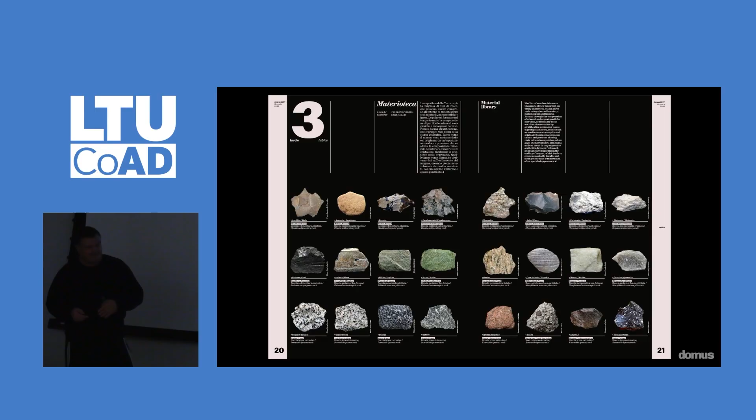By looking at stone, we looked at the history of stone as a building material. We looked at where different types of stone actually exist geologically, and the different structural buildups between granite, marble, and limestone—they all have different attributes. We looked at ways of working and finishing the stone.

Take a look at this—this is structural stone making the arch, or look at that wonderful stairwell that just seems to be hovering in space.

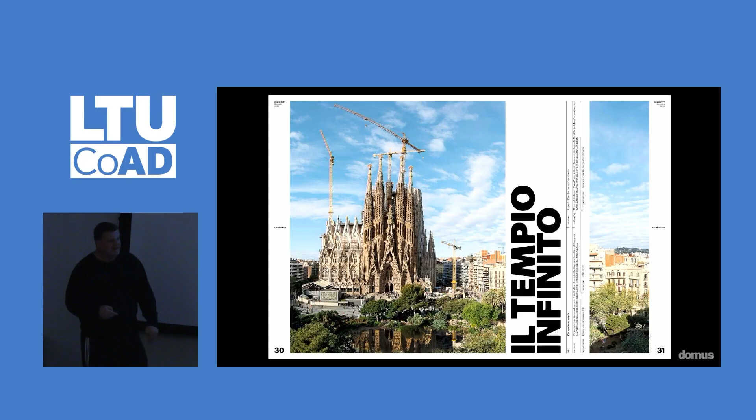And looking at ways of reusing stone because it's such a solid material—a stone cathedral that's been under construction for 140 years and will finally be finishing this year: Gaudi's cathedral in Barcelona, a 140-year construction site.

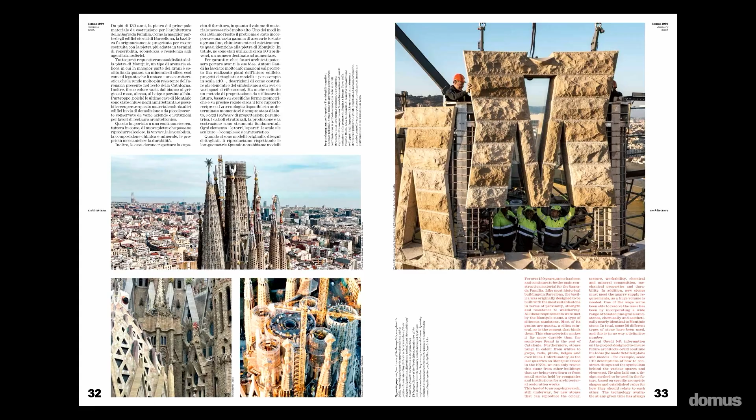When Gaudi designed this, they hadn't even made the machinery to actually produce the stone the way he had drawn it. It's as if the technology had to catch up with the designs—if you're talking about designing for the future, it's only now that we can actually finish those designs that he made.

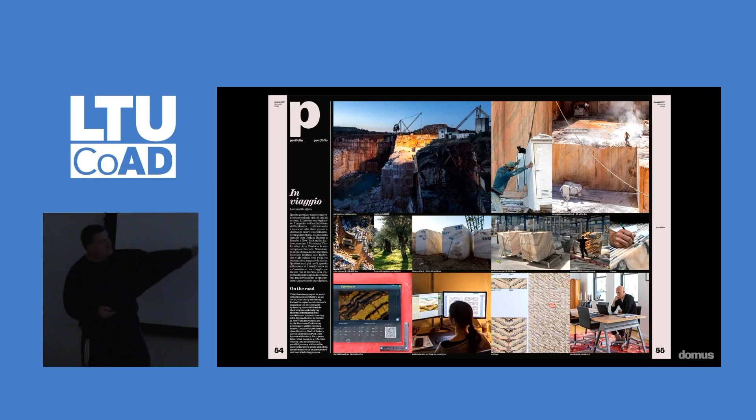How new designers are using stone in a very fresh way—following it from its origin quarry through to the use of this beautiful marble, Carrara, in the Perelman Performing Arts Center. Oftentimes architects are limited in how they think about materials because you have to follow rules and regulations, so artists are free to really delve and discover.

So we capture a lot of artists using stone—these are big chairs that swivel, almost like they're light; your finger can just push them and they swivel around. These look like cushions or pillows, but are actually travertine—thinking of stone in very different ways than we typically would.

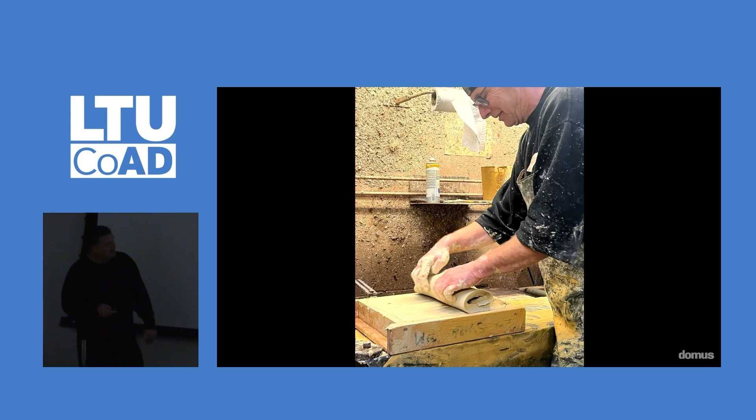We also asked the artisans, the people who work with these materials, to help us make all the covers. Here's a smoking fellow making the Domus stone cover. Here's a clay artist making the earth cover with baked terracotta, and you can see how many different treatments you get—a concrete worker making the concrete cover, and metal.

Now I want to switch gears, because that one year of curating the magazine gave us a real in-depth view of these 10 different materials. Now I want to take you through and show you how in our own work we actually work within materials, and how they become the drivers of the design.

We're going to start in the Arctic Circle in the northern parts of Sweden. There's a lovely family who for a decade have been inviting different architects to build tree houses in their backyard—what a cool project to get. They've been building one single bedroom up in the treetops at a time. We were the 8th architect they called, and this is their backyard—you can now Airbnb rent these tree houses for a night or a week and hang out.

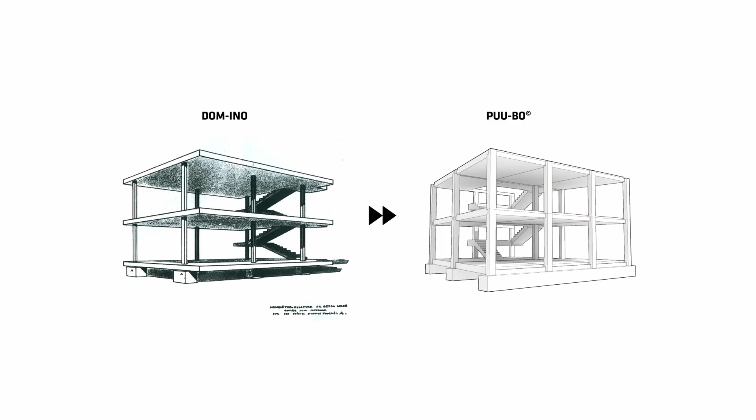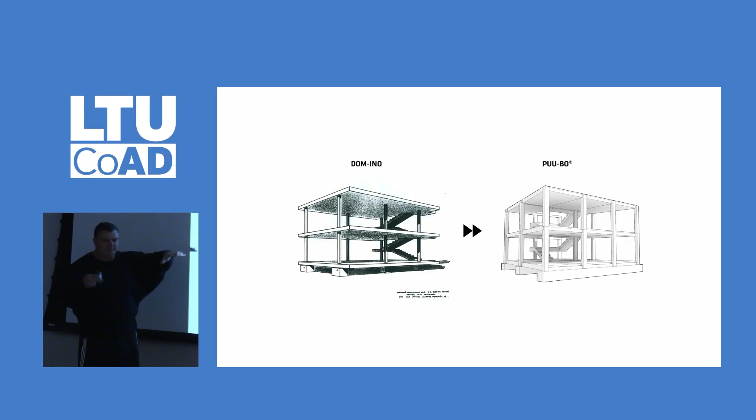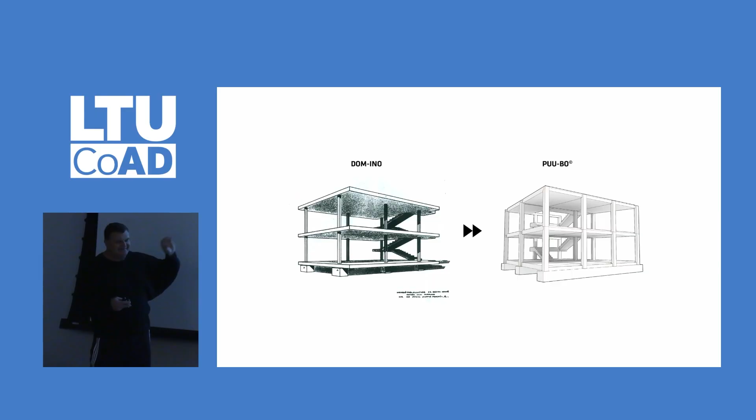Also in the vein of wood, this is something you should be familiar with - Corbu's Dom-Ino house. This was a concept at the start of modernism where new materials were suddenly being used: reinforced concrete, large panes of float glass or flat glass, which weren't really available before then. So this idea of a free plan, as opposed to a building with a bunch of rooms - it's more of a warehouse kind of idea, and you just put up partitions in that space. You're really just making a column grid and a fire stair that takes you from top to bottom. It's taking architecture down to the essential elements.

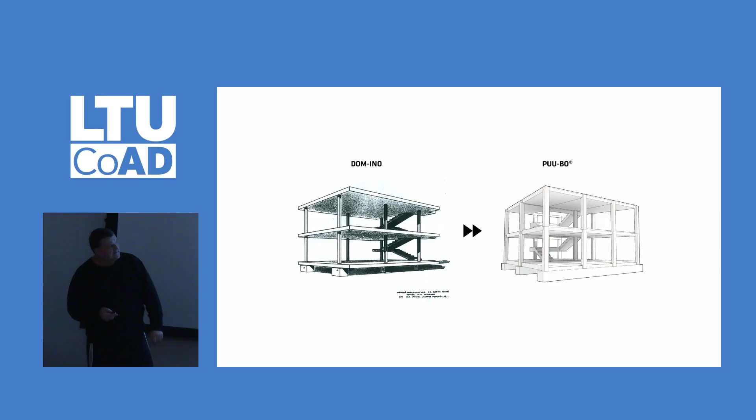But we hadn't really thought of a sustainable approach to modernism or the Dom-Ino house. So we came up with a grid system, a prefab system out of wood that we call Puu-Bo, because it's manufactured in Finland. Instead of a rigid square or rectangle, it's a wedge, like a piece of pie, a pizza. That allows you to go from just bar buildings and double-loaded corridors to designing things that are a bit more organic and can fit into different sites.

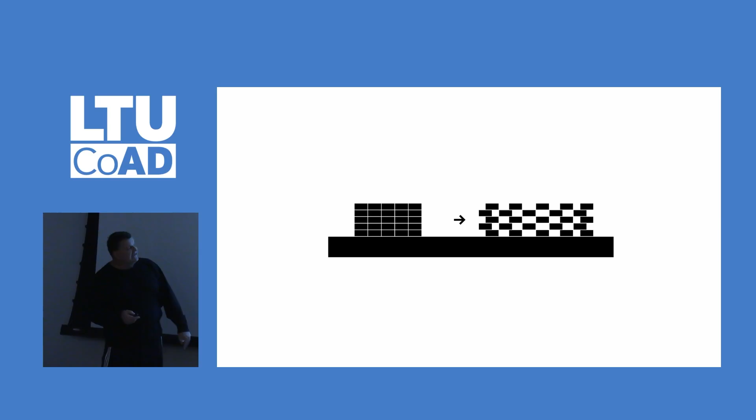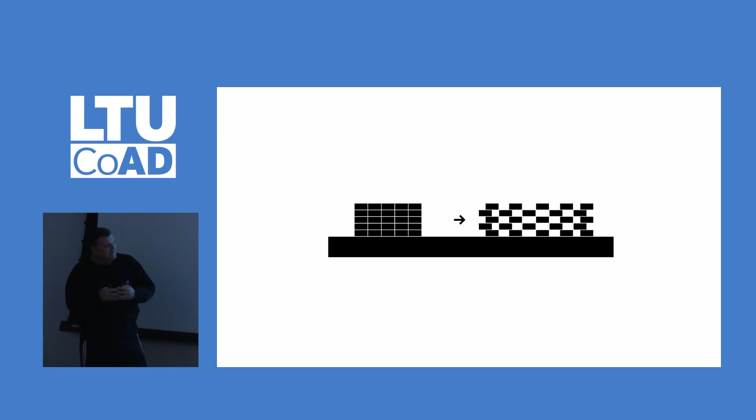The other idea we had was that rather than just building one on top of the other, which is typical in prefab construction, what if we pulled the prefab elements apart, creating a porosity? The beauty is that when you consider each prefab element, which is the darker square, by pulling it apart you actually create space - you get a roof, a floor, and two walls for free by pulling apart the prefab elements.

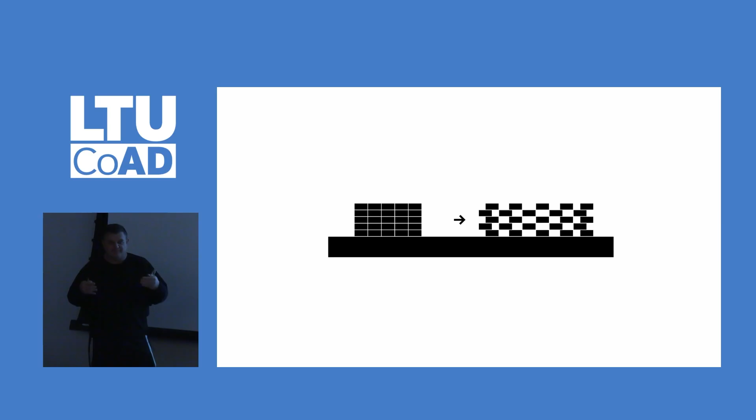This is a standard prefab kind of project, very efficient, very rectilinear. That's the same project built for the same price, but it gives you a lot more space - same number of units. What's nice is it gives you the chance to actually design the site, not just put a building straight down along the street.

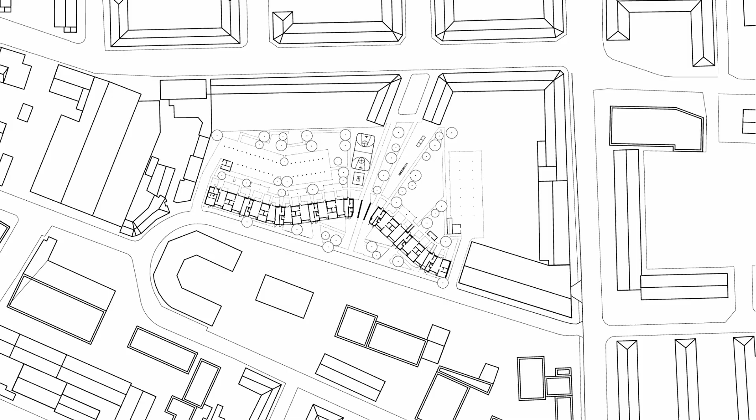Looking at water is more enjoyable than looking at dirt. And thus, any building that is next to water has a higher value.

Imagine that we take rainwater that's for free and we push it down underground, and it just causes problems all over the place. We could instead build retention ponds, have the water come into the ponds, enjoy the water while it's there, and it naturally evaporates. Then you don't have to invest in all of the underground canalization.

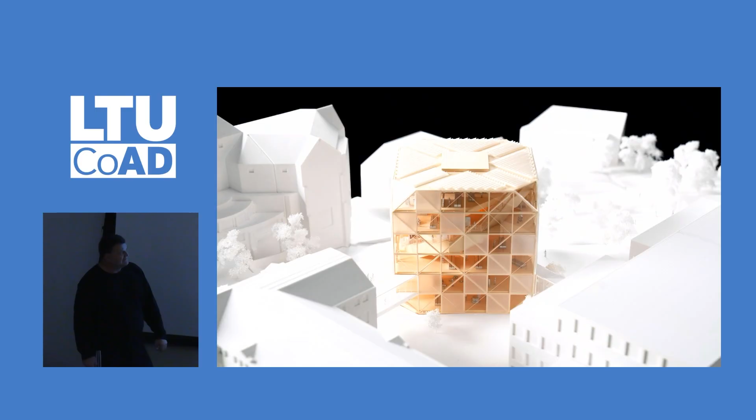So what we're doing is we are historically preserving this project. We are adaptively reusing and reshaping the 1970s project, and we are adding the cube, the wood cube, in the center out of mass timber. So now this is a campus of 3 buildings from 3 different eras that will be the centerpiece of the school. It's 6 stories, and it's 100% mass timber.

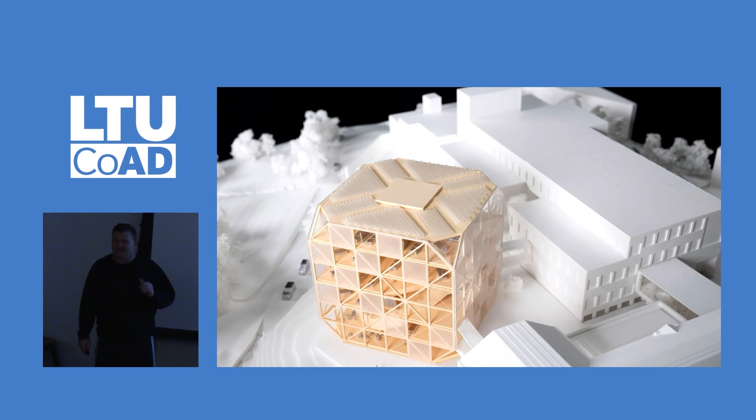You'll hear mass timber being used a lot. And when it's used, you should ask, well, does it have steel in it? Because then it's not a mass timber project, it's a hybrid project using wood and steel. Most often the steel is there for all of the forces that the wood can't endure. But what we wanted to see is, could we create a 100% mass timber project? Because it's been done at different scales, smaller scales, not at this scale.

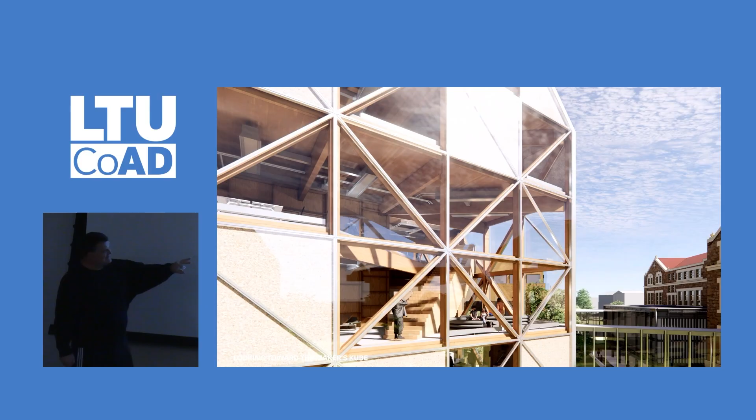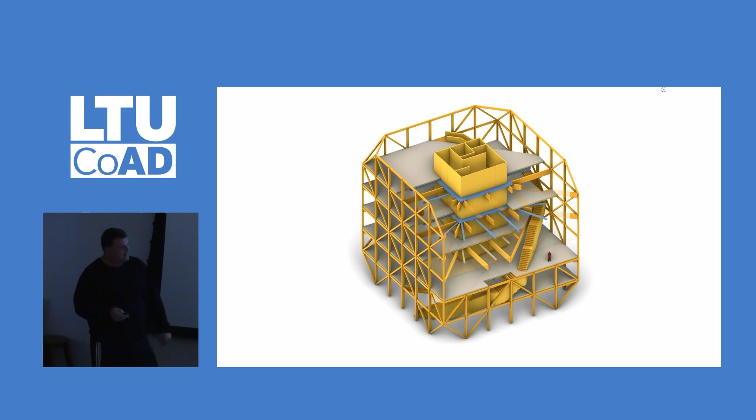Here you can see a few renderings, and the space has this wonderful stair that leads up. There's studio spaces that look down into each other. Here's the structural principle, which we have worked out with StructureCraft. They are essential in having both the architecture and the engineering actually work. A few of the structural diagrams show you which walls are performing which of the jobs.

Now, I realize that this gets quite technical, but as students of architecture, it's really important that we open ourselves up and work collaboratively with engineers, because we need to understand how the engineering, the shear walls and the cross bracing and all of those things will actually affect the spatial solution.

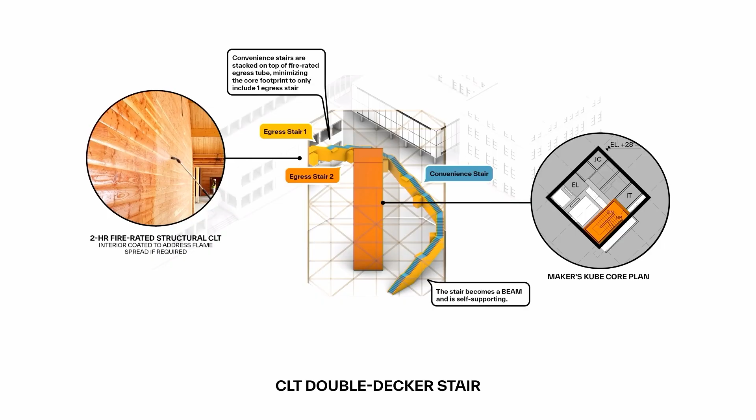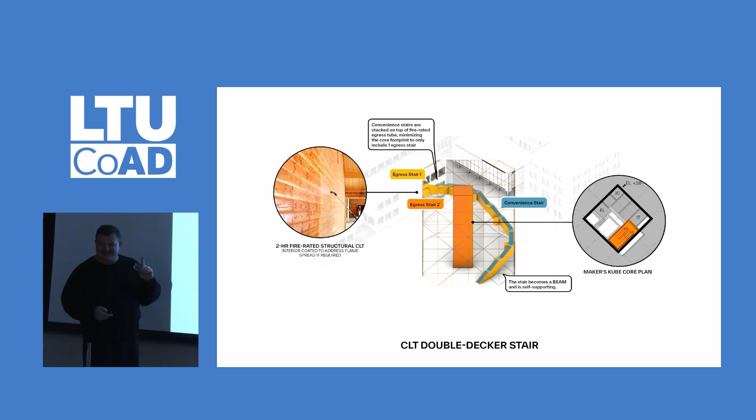So this is where you take all of the structural ideas together, and then look at the stair. The stair is this really interesting thing where you have a top stair in blue, which is basically a stair that leads you open air from the top of the floor down to the ground floor. But it also needs to have a fire stair, right? So underneath the blue stair, believe it or not, is another stair that's fully enclosed. That's your fire stair.

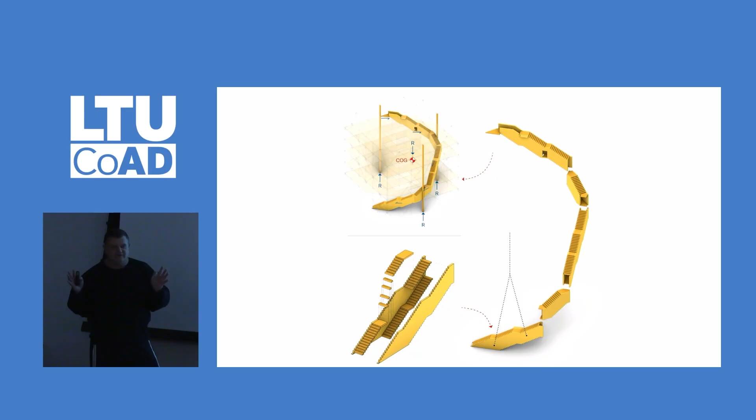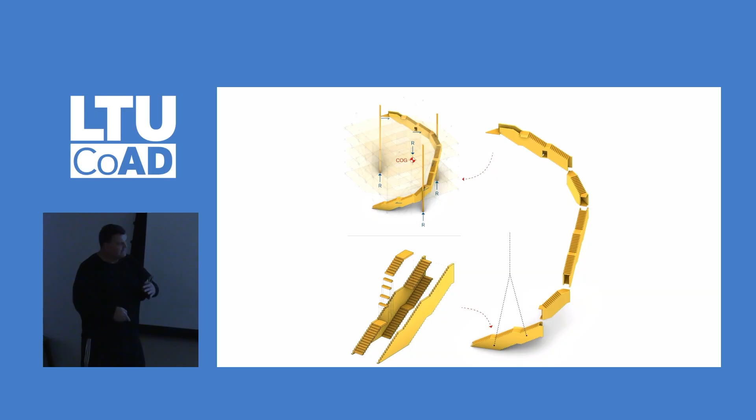And because of the thickness of the wood, the charring that happens during a fire, this is actually rated the same way as if you put 2.5 or 2 layers of gyp and you fireproofed and did all of that—this is actually performing better than what we would typically do for fire stairs. And this all had to go through regulatory approvals, and we had to show how this was working. We had to fire test the different constructions. We had to go into the weeds.

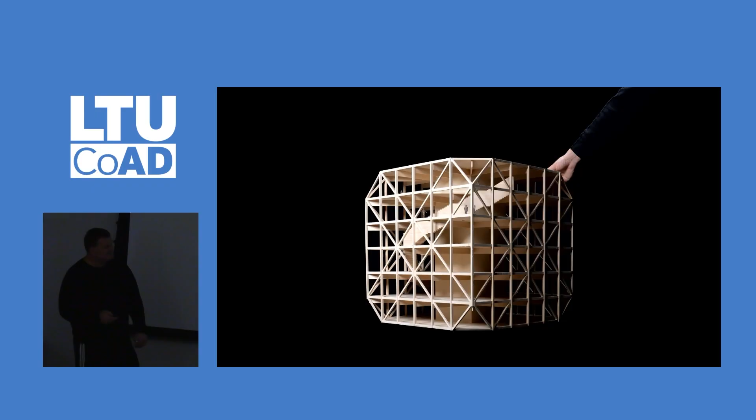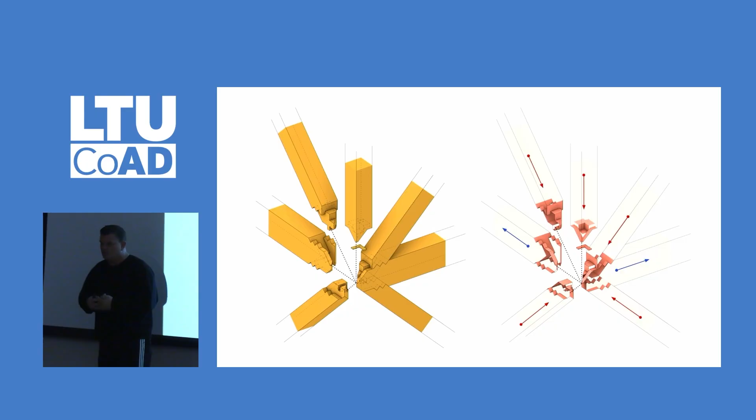I'm so excited to say that this is going to be a school of architecture in about 3 to 4 years. This is how we get the wood on wood connections with no metal. So we're using Japanese carpentry and using the kind of CNC machines and routing machines that allow you to get that kind of a detail.

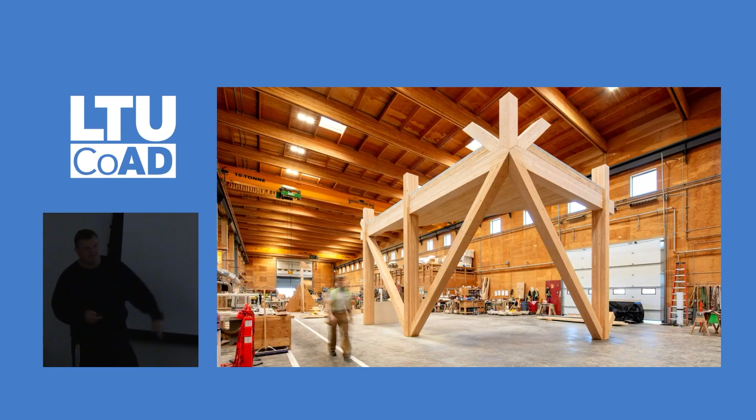So this is with StructureCraft, who are both the engineers, the fabricators, and the installers. It's very rare that you would be able to find all three of those things in the same group. This is a one-to-one mock-up that was built for just one corner, and then this shows you the actual joint.

Now, I saw a bunch of incredible car designs out there in the school, so I put this one in here because we all know Toyota as one of the largest car manufacturers in the world, but they had an issue. They came to us and said, architects, when they show the future of the world, there are no cars, there's only bicycles. What's up? What happened to all the cars? Why can't you guys put cars in your renderings? And help us understand what the future of driving could be.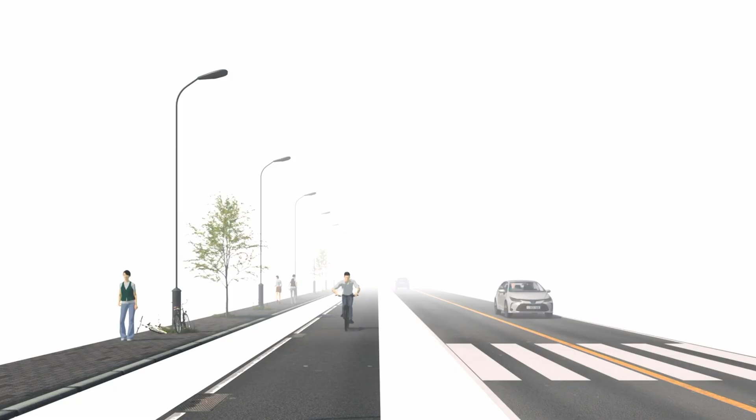So this is Toyoda-san and Bjarke at the Consumer Electronics Show in 2020, I believe. So this is the idea: in a typical street, you have sidewalk, bicycle path, and street all connected and in the same place. So what we're saying is, what if we actually take each of those three different mobilities?

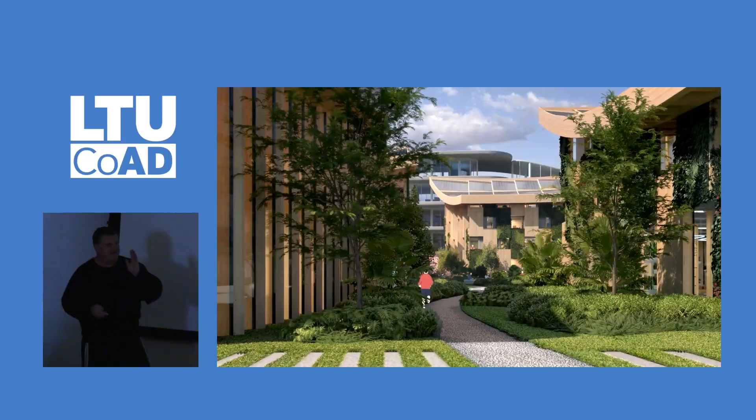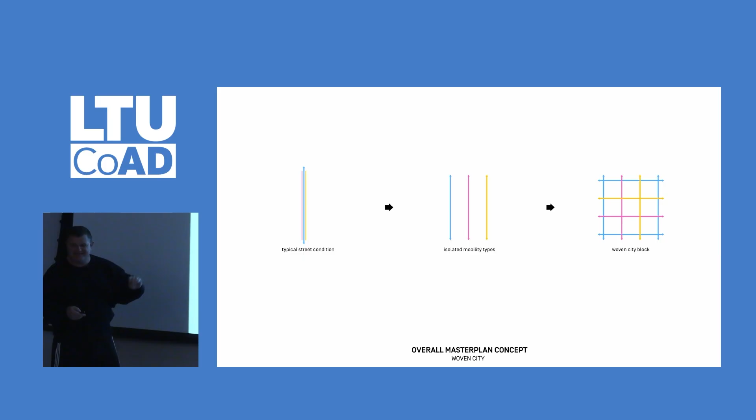Autonomous vehicles have one street. Electric bicycles and scooters would have a secondary street. And pedestrians walking and strolling would have a third street. Instead of having a grid within cities where all three are always combined, we actually separate them, so New York would have certain streets that are just vehicular, others that are just scooters and bicycles, and a third that is just walking. What if you thought of that grid having those three different movements still able to access and deliver to each site, but you create safer corridors for different speeds of movement? And what if you start doing that at a city scale?

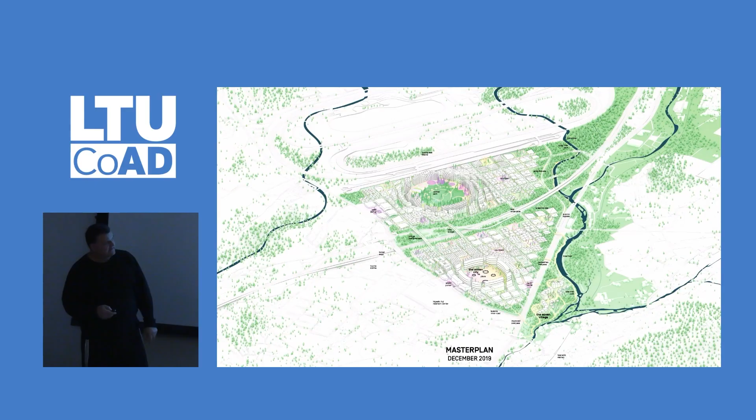So you create plazas, little parks, pocket parks, and so forth. Toyota basically allowed us to take a 1960s car manufacturing site just at the foot of Mount Fuji, and to start planning a new way of building a city using their technologies of autonomous vehicles, robotic movement of drones and delivery systems, and e-bikes.

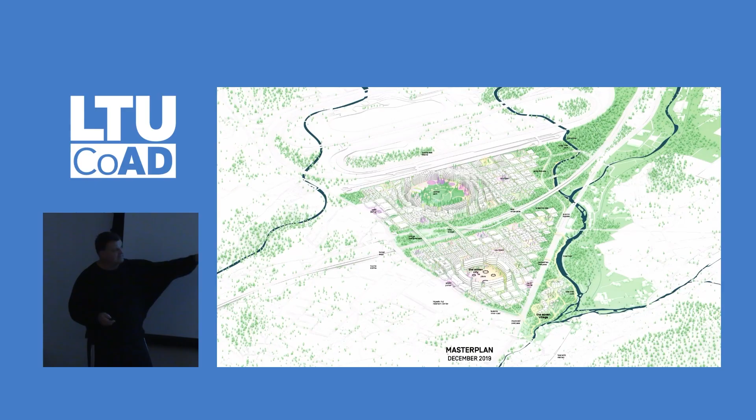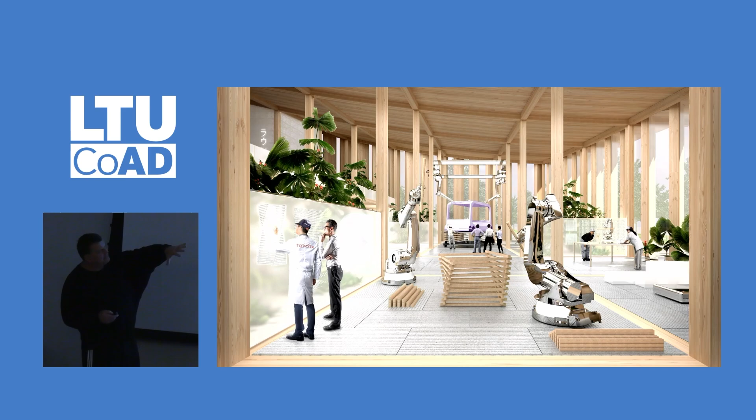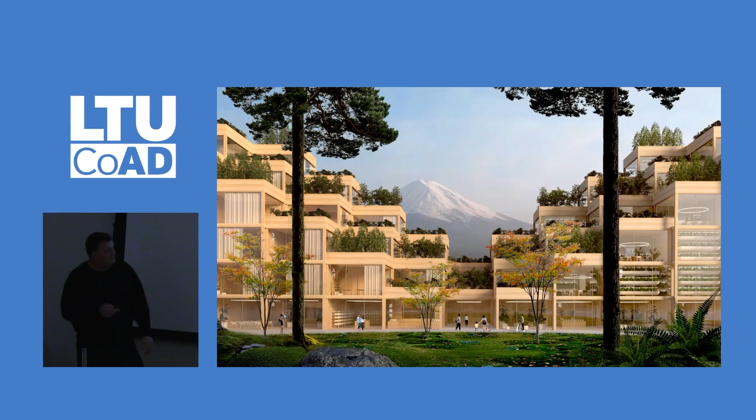And we created a vision, again using Japanese wood architecture principles, to create laboratories to test out new technologies, to create multidisciplinary locations for people to exchange, and to create living opportunities for multi-generational housing that would all be testing.

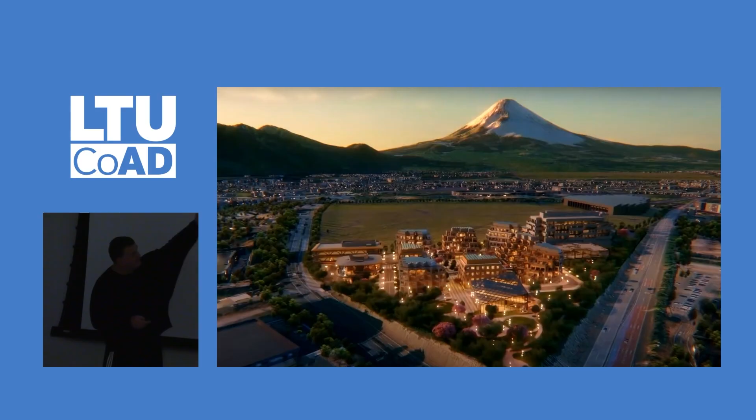Phases 2 and 3 are what you see in the background there, a construction site from when that was under construction. So it's literally a laboratory for the future of mobility, some of which I saw also in the hallways here, those autonomous electric cars.

We're going to go to glass. In glass, we worked with Google on their headquarters in Mountain View. The interesting thing here is that Larry Page, one of the co-founders of Google, was trying to hire an architect to build the headquarters. He literally said, you know, when engineers have a problem, they stick 10 engineers into a room, and they collectively solve the issue. When you architects start to design things, you like to do it individually, and then it's your idea. So there's a little bit of ego in the making of a project. He wanted to test out his theory that if he actually hired multiple architects and we had to work collectively together, he might get a better building out of it.

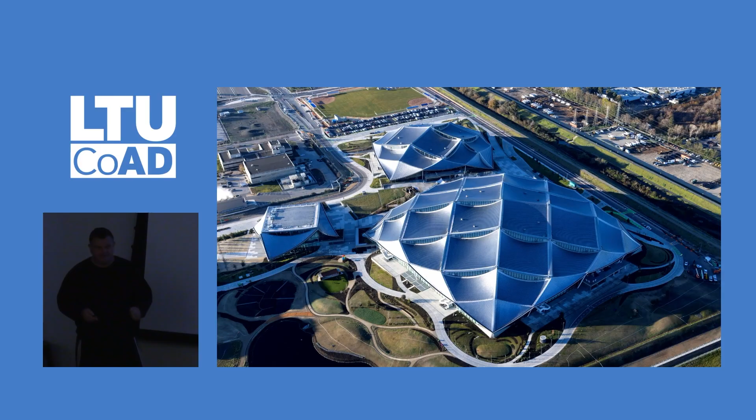So 3 architects, Big, Heatherwick, and Adamson, actually all had to work together to design about 5 million square feet for Google in Mountain View. And this is now all built and taken into use.

What you can see there, what we developed were 30 new building systems, one of which was the roof tile, a photovoltaic tile that actually generates 40% of their operational energy just from the sun. Maybe the difference from your grandparents' solar tile is that instead of this rectilinear contraption that looks a little ugly up on a roof, with a huge tank underneath to kind of take all of the solar power and harvest it.

These are wafer thin. They can actually bend if you just attach them at 2 points, and thus we can create swoopy kind of curves on the roof. And they are better performing than the solar photovoltaics from the past. In the back it's a very small back of house that connects straight into the electrical system. So these are what you basically work underneath - what we call the handkerchiefs.

And there are 3,000 Googlers working right there, basically probably all on Gemini, because this is where the AI team is working. And what Larry Page wanted was - if any of you ever heard of Burning Man - he wanted to basically have the playa where all of the different camps of Googlers were, and then he viewed the sky as sort of clouds passing across, and he wanted to be able to see everything from one vantage point.

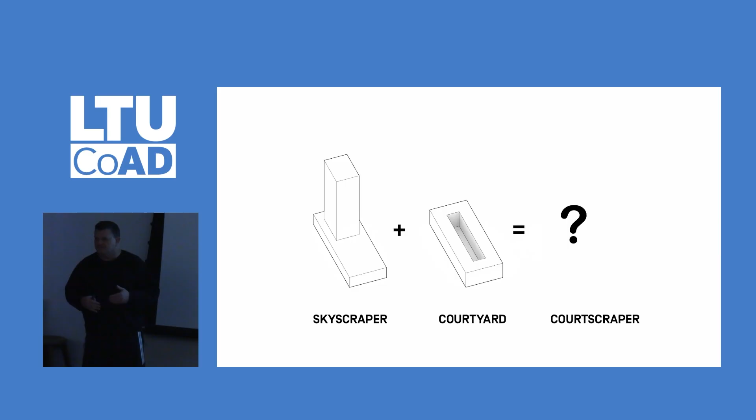We're going to go straight to metal, and here we're going to go into New York. What brought us to the US was this project in New York called the VIA 57 West. It's 705 apartments on the west side of Manhattan. Typically you have a skyscraper in New York, and in Europe you have courtyards. What if a skyscraper married a courtyard? Well, you get a courtscraper. And that's basically what we created.

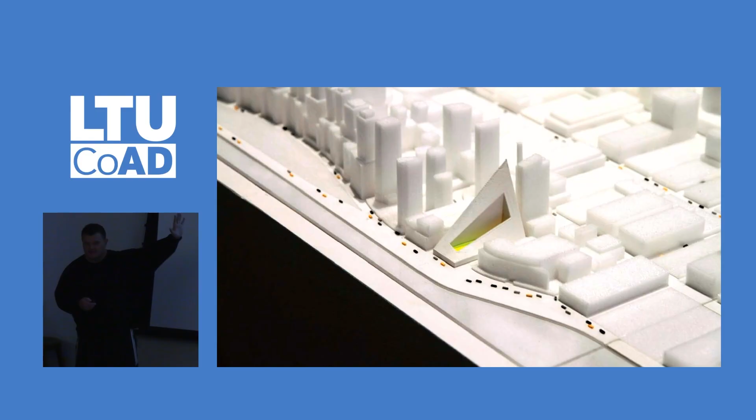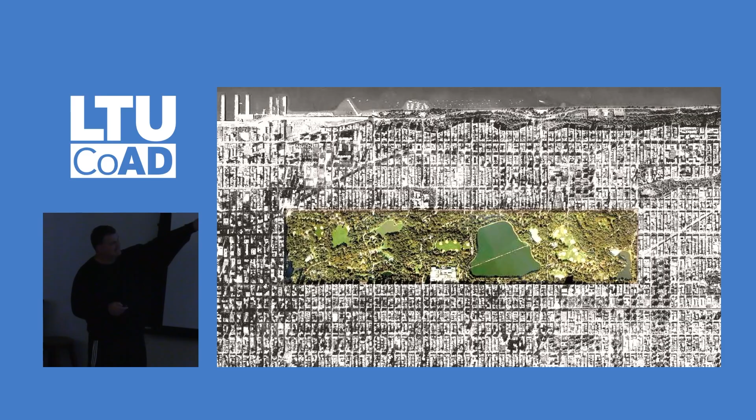It's low, 4 stories on the water side, and moves up to 44 stories on the city side. All of the folks have this wonderful garden on the 2nd floor that they can use, which during COVID became the building everyone was trying to get into, because it had that generous space. So just like Central Park acts as this wonderful release and relief of the city, so too does our courtyard - it's just 13,000 times smaller than Central Park for 705 apartments.

And the width here, interestingly, is the same width as a city street, 60 feet. So if you can live across the street from people and look into their windows, that's literally what you're doing here too. Within the park you have a wonderful array of different spaces. Imagine living in Hell's Kitchen, New York, in a 1-bedroom apartment, and you've got birds tweeting outside of your bedroom window - a pretty unique experience within the city.

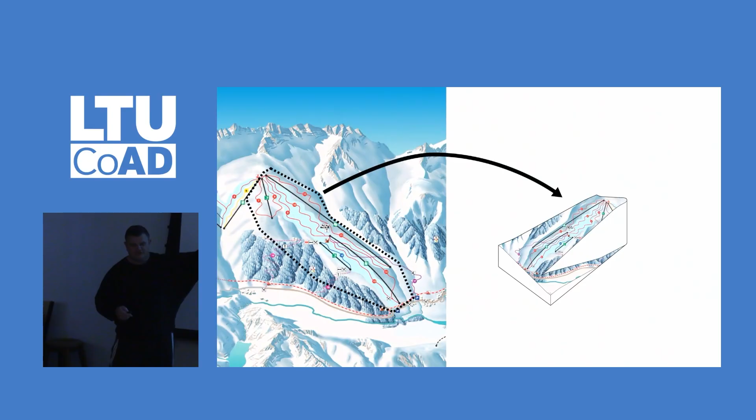This is Copenhagen. What you see there on the horizon is a waste-to-energy plant built out of mostly steel and metal. One bag of household waste is equal to 4 hours of electricity and 5 hours of heat. So this is the biggest building in the history of Denmark, the tallest in the flattest country of Europe. And since Scandinavia - Denmark has snow but no mountains - we take the mountains of trash and place an artificial ski slope on top of the trash incinerator.

So the trash incinerator functions like any other incinerator. It has a lot of furnaces that take the household waste, burn them, and in the process create energy. But on top of it is an artificial, recycled plastic, skiable surface. So you can come up to the top, put on your skis, and then enjoy a lovely ski down white trash.

We're going to go to concrete. So our own headquarters, we took as a time and an advantage to actually test out different materials. This is a concrete that actually uses 30% less carbon than traditional concrete, because we believe not everything can be built out of wood, which is a nice material from a carbon standpoint. So we will need to be smarter about concrete and steel, and do as much research as we can building from those.

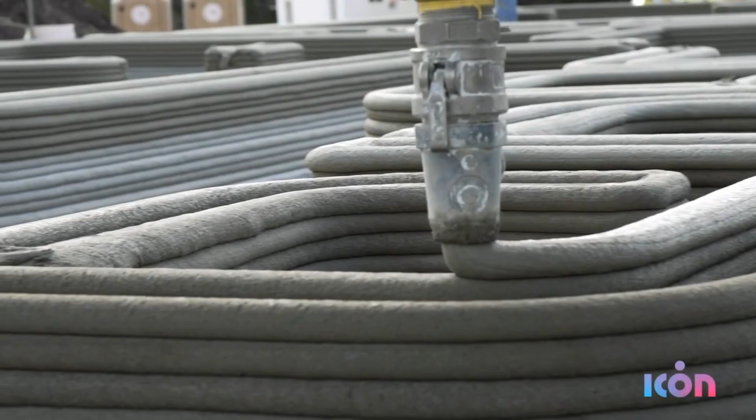We're at the tip. Also concrete, this is a 3D printer, and very much in the future, we're going to be basically seeing homes or small dwellings 3D printed with a sort of cementitious fluid material that kind of hardens as it's actually coming out. And you can see it here. It's just incredible to see, just within the 8 years that we've been working with it, how many advancements have already been made. We designed 60 different house plans for the technology.

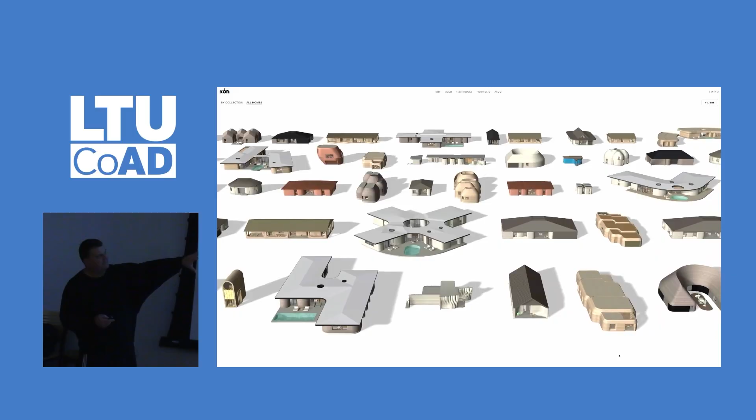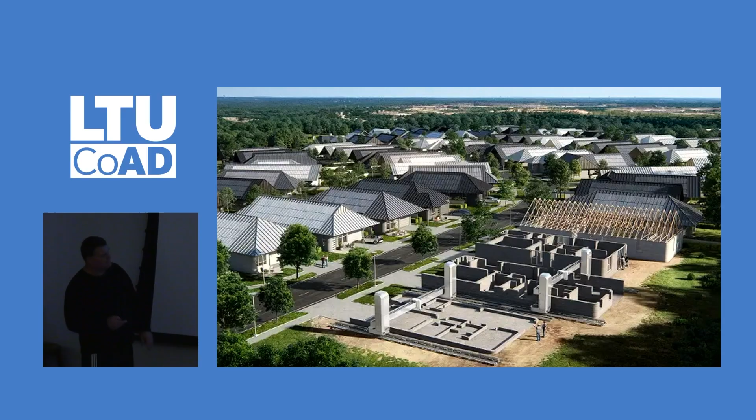You can go to the website of ICON Build and choose one of these, and then you could arrange with them to bring the printer, and literally in about 14 days, 20 days, you would have a printed home turnkey to walk into. So then there's already examples of homes here. It's 3D printed walls, but traditional wood framing for the roofs. In the next iteration of this, the roofs will also be 3D printed. And then also providing affordable housing in places where we're bringing the construction cost, the hard cost, down to about $60,000 for a 2-room home.

With the same company, Icon, we're working together with NASA and the Artemis rockets that just went to the moon and back. And we're designing spaceports and habitable spaces on the moon, printing with the moon dust, the regolith, on the moon. That's the building material. And then the printer is just basically taking it, because it has a silica. It's actually made up of obsidian. And there are examples already in Houston where they're building and testing how this is going to happen. This is a picture of some tests that were actually done with Icon. And all of this is actually funded through NASA a few years ago at $60 million. So hopefully tax dollars well spent.

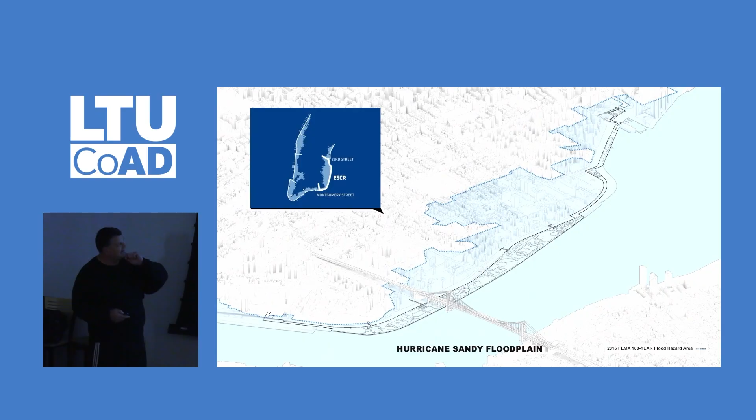Biophilia. So it was said that I work at a scale of the city and resiliency. So this was New York 2012 after Sandy. So now 14 years later, we came up with an idea to raise the edge of Manhattan to protect it against sea level rise. And this is not new. New York has been expanding and raising its edges for centuries. So this is in blue, everything that was flooded during Sandy. 200,000 people were homeless, $19 billion of damage just to the city of New York.

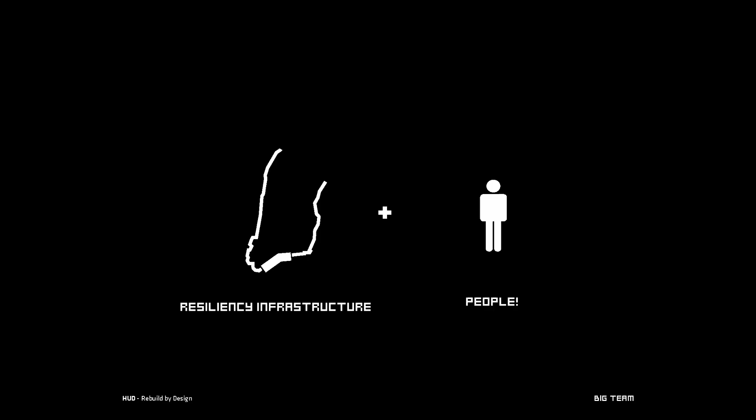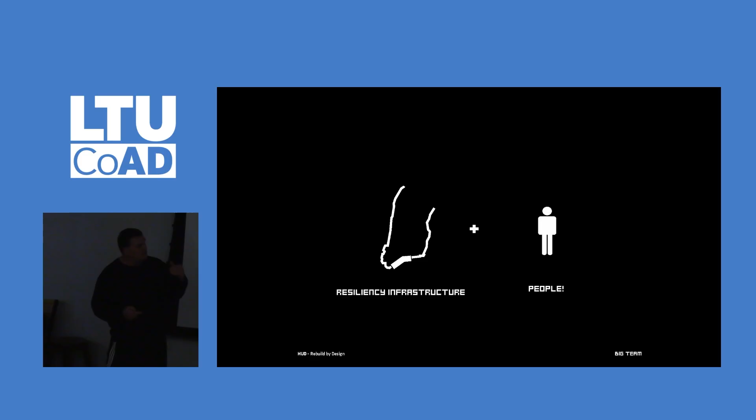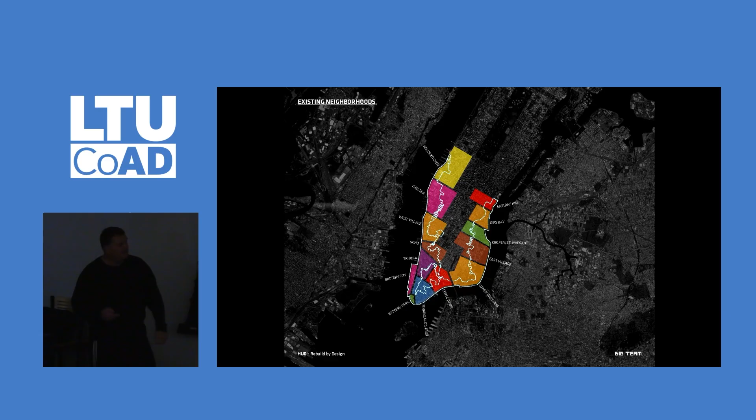And so with, again, a huge group of many different kinds of specialists, and taking over hundreds of community meetings to hear what the community wanted and needed, we came up with a kind of solution that we call social infrastructure. So typically infrastructure is done by engineers, and it's done very rationally. How do you get from point A to point B the quickest? We were kind of looking at how can you create infrastructure for people and think about the activities that the people actually enjoy. So we infused the infrastructure with side benefits, kind of win-win. And we make it and change the uses based on the different neighborhoods and the different kinds of people who are living there and their needs.

We also can't just build one continuous 10-mile long kind of solution. So we break up the solution into segments that are fundable, buildable within sort of 5-year segments, and create something that can be done in one mayoral cycle.

So that's a lot that I just said. We have 6 clients, not one. One's already hard, so imagine 6, and they don't like each other. The Department of Transportation builds roads, and they're like, why is the Department of Parks here? They like trees. So trying to get the parks and transportation departments to actually move in the same direction is pretty hard. But that, to me, is also design. This is also how one actually manages and navigates that.

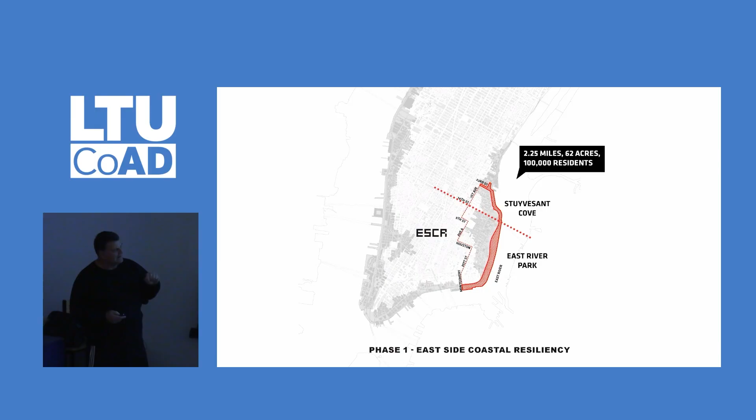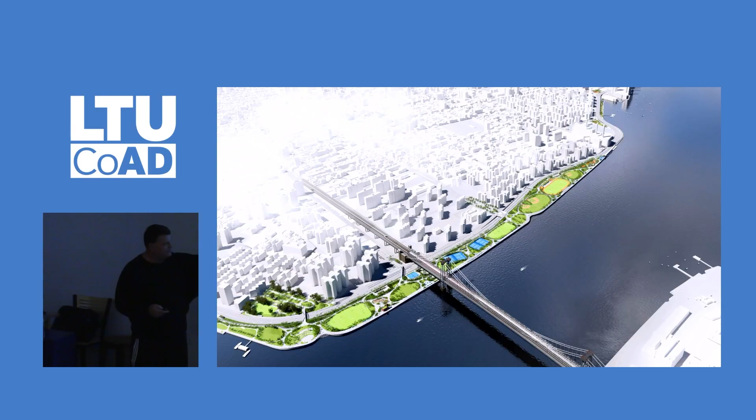So the first 2.25 miles is called ESCR, East Side Coastal Resiliency. You can see here the size is 62 acres compared to other parks in New York. And this was our vision. We call it a parkapelago, an archipelago of parks. You can see here there are little programmatic uses in each of the little islands, and it's built.

So voila, 14 years later, it's there, and people are actually enjoying it. It is raising the edge of Manhattan about 8 to 9 feet, and people can now rest assured they're not going to get flooded out of their homes. Kids are loving it, and there's different uses from soccer fields to baseball to tennis to multi-generational to a music park, so something for everybody.

Again, it's an idea that if you remember Katrina in New Orleans, they built a dumb gray wall. They basically built a wall that everyone looks at and hates. This is an idea that you use the same amount of money that was spent in New Orleans to build a wall, and you use it to build a park that everyone can enjoy every single day, and it's not something that you look at and hate. So that's the idea, that this park is viewed as something that provides more benefits.

Earth. This is our latest project, just completed a couple of weeks ago. It's called Not a Hotel, but it's a hotel. It's in Japan on these islands, and it's a small sort of 3-home kind of design that is a 90, a 180, a 270, and a 360. Very, very simple. Each of these homes is actually built to bring the old Japanese traditions into the new world.

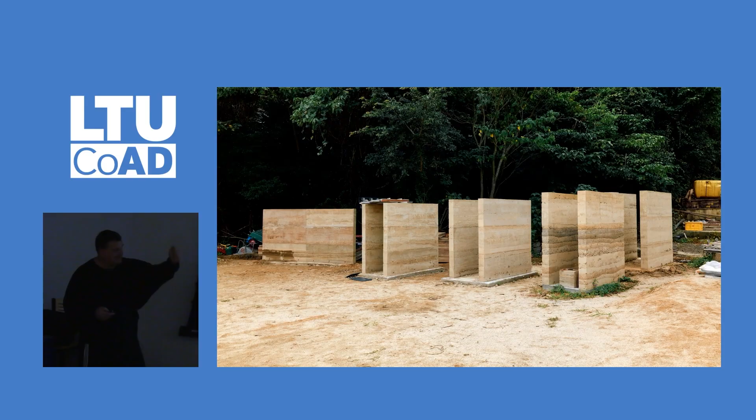So instead of shoji screens, we have glass screens that open on a curve. Instead of clay tiles, we have solar tiles on top that generate electricity. And instead of earthen walls, we have rammed earth walls that have been stamped using the earth from the site. So it's kind of a Japanese tradition, but brought into a new world. These are not renderings, these are images. Bjarke was just there and enjoyed it immensely. So next time, Airbnb, Japan, you got a destination.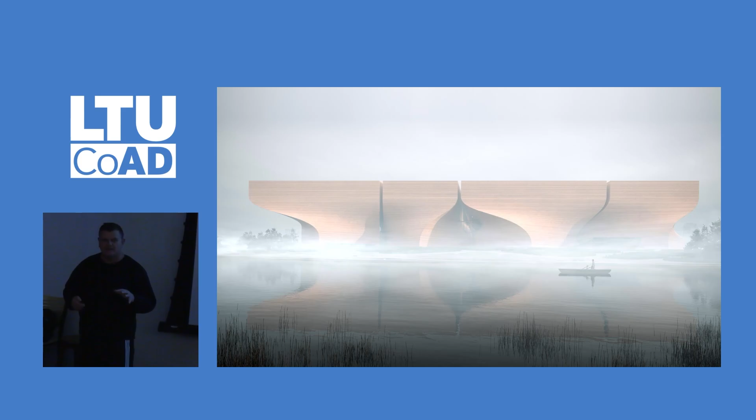This is in China, just because I told you we're going to travel around the world. This is a museum of natural history. We have one in New York, and that's where Night at the Museum, the movie, takes place. So this is the Chinese version of Robin Williams riding a horse through the museum. But here you have 8 different galleries that are all showing different epochs of history, natural history, within China.

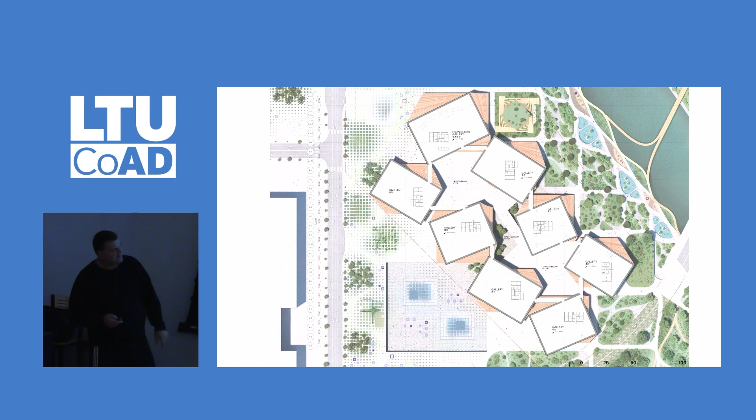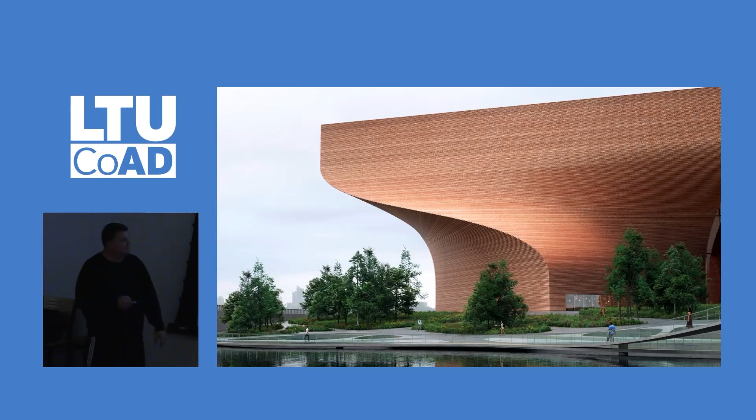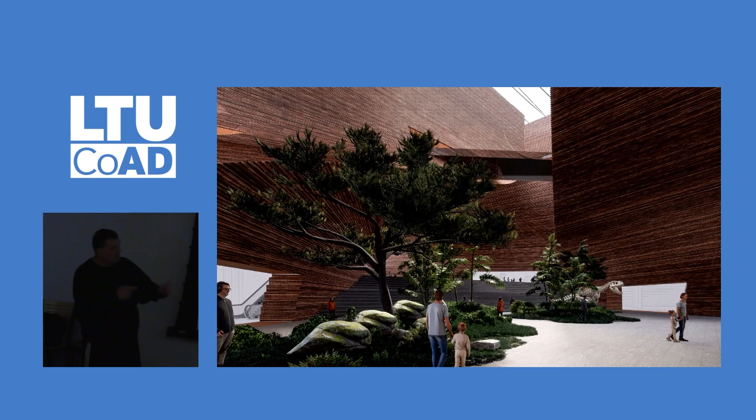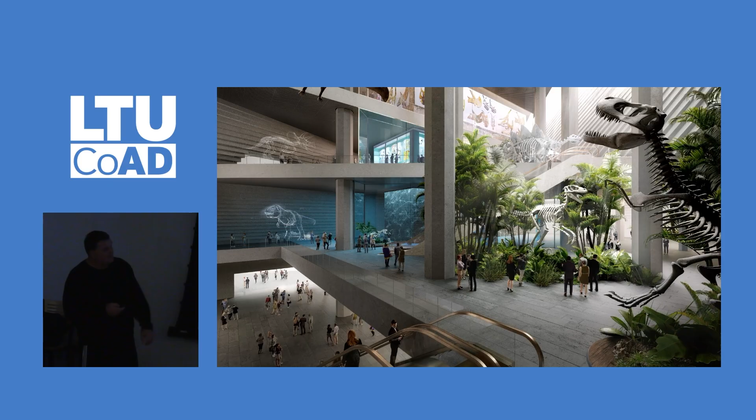It originally follows the street grid over here on the left, but then it migrates toward the river direction there on the right. And we use terracotta, a very Chinese kind of material, to build the twists of the galleries. This is something that has to be really, really worked hard in order to create that kind of seamlessness that you see there. But these are all baked in kilns and ovens, made as pieces that you can carry with 2 hands and then assemble onto the structure. This is under construction at the moment and will be done, I think, by the end of 2028.

We're getting to the end, but we're going to now combine a lot of those materialism ideas into a single project. This is Bhutan. Bhutan is a small country sandwiched between China and India, but 70-80% of it is forest. 90% of it is mountainous. So it's very hard to build.

Wonderful culture built on Buddhist principles. It's a monarchy, so there's a king, and it's been ruled by a monarchy for centuries. There are 800,000 people, and 80,000 people have left in the last 10 to 15 years. The king was just thinking, if that continues, and they're typically younger people who don't see a future for themselves, then I will not have a country in my lifetime.

Or I will have a country that I can't sustain because of the inequity of age. So he's asked us to basically design a new city from scratch for 80,000 people, the same number that have left, but to do so that we actually show what the future of Bhutan can be. And he asked us to design this city on the values of Buddhist philosophy of mindfulness, compassion, wisdom, inner peace, togetherness—very different than Western values that you would typically have. So it's called Gelephu Mindfulness City.

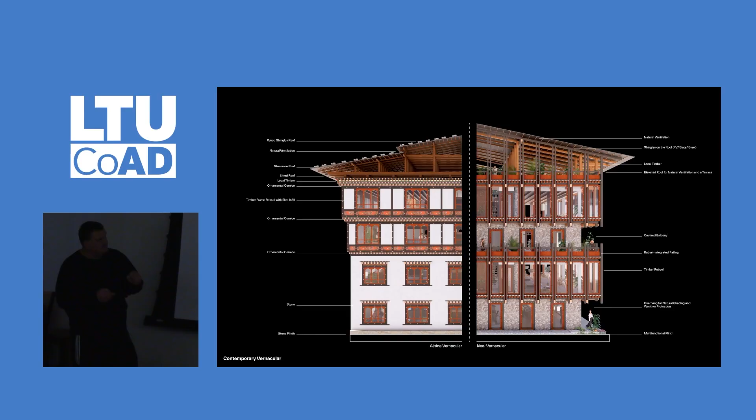And these are the materials with which we're going to work: bamboo, wood, earthen bricks, and stone, river stone. These are the typical ways that the current Bhutanese architecture is built, made up of stick-built construction, and they have a very strong identity. They build typically 4 and 5 story buildings, and we're learning from those kind of principles. They also have never really had architects—they've done most everything with master craftsmen teaching other apprentices and pupils how to build.

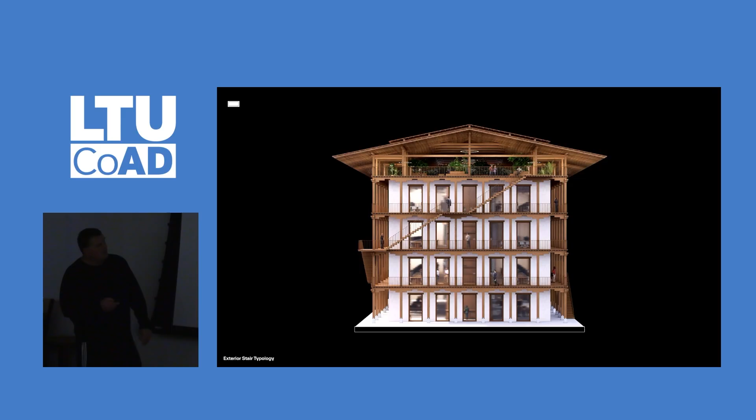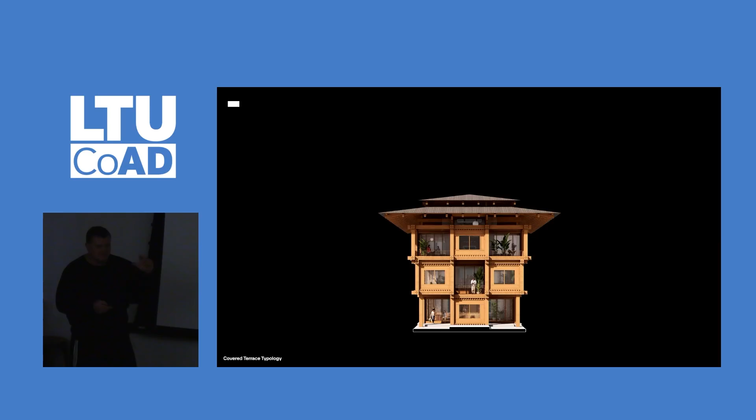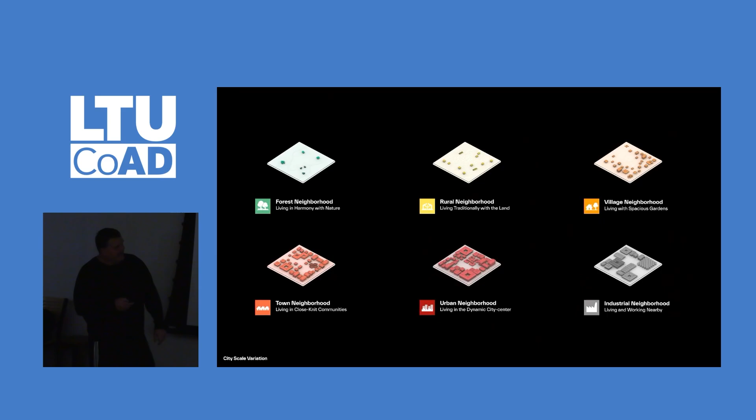So we're both looking into the past to learn their traditions, but we're also looking for ways to turn this, like in the Japanese house, into a modern interpretation of the past. So we're looking at a lot of different scales and different courtyard to object buildings, and at different neighborhood configurations.

From the mountain, where things are built within the slopes and you don't have a lot of density, as you move down the mountain the density starts to increase. These are 2 and 3 generational homes where you have the grandparents living with the grandkids. Then as you move down the hills, things become a little bit more dense down into the actual village or city of Gelephu.

This is all financed, believe it or not, by water. They have a hydroelectric dam from all of the river water in the mountains. They sell the electricity from the dam to the Indians, and that's what finances what you've just seen.

But instead of a dam—remember I used the word social infrastructure—imagine a dam that becomes a pilgrimage of stairs as you walk up the entire face of the dam to a temple there in the center of a lying Buddha. So you kind of walk and allow the entire infrastructure to be a journey.

We also are being asked to design the airport that, because it's the flattest part of the country, will allow people to come in. So this is based on Buddhist principles and Buddhist architecture—an airport built in the Buddhist style with incredible intricate carpentry.

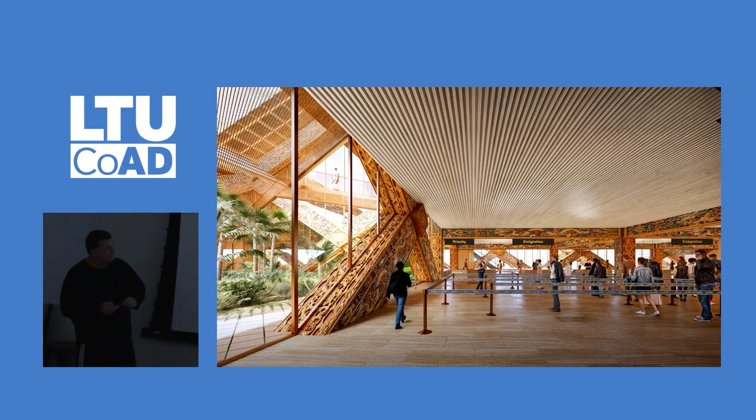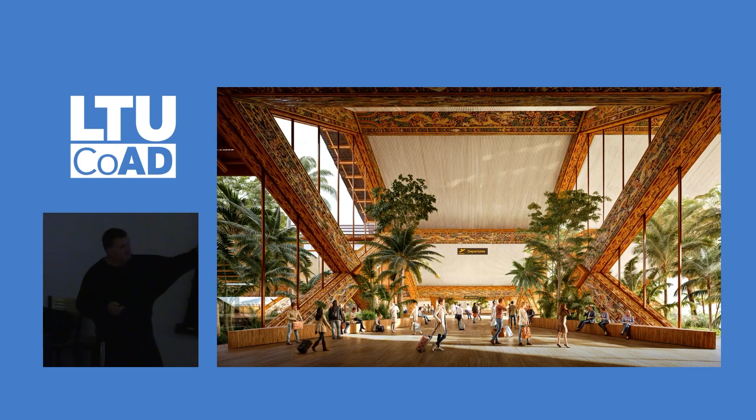The only issue with building in this way is that there are not enough carpenters, Bhutanese carpenters, in the entire country to actually build at this scale, because they've never built a building this large. So at the last Biennale—remember I mentioned the Venice Biennale—we actually took 2 Bhutanese carpenters and they were carving the beams of the airport basically as a test.

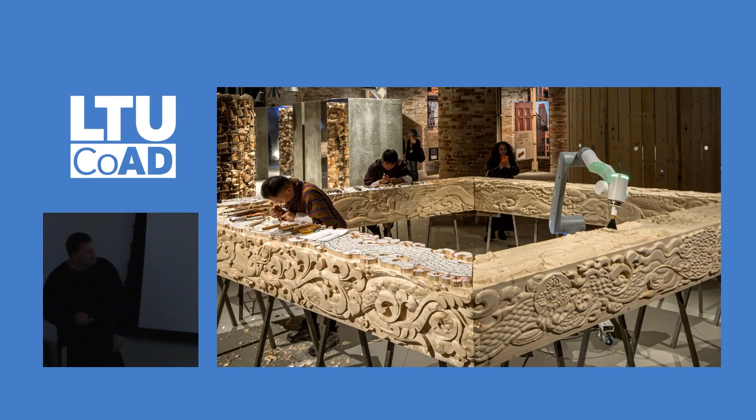But the 2 carpenters basically see this as the only means, also because they see fewer and fewer apprentices coming to learn this. This is a way for the craft, the Bhutanese craft, to actually live on. And so they are actually supportive of this idea of machine learning carpentry, which would then allow us at the scale that we are intending to build an airport of this scale.

So the runway is under construction. The king is pretty happy with the way that we're working, and we're working with a lot of local Bhutanese architects now to bring in the design principles—it's really their project now to realize.